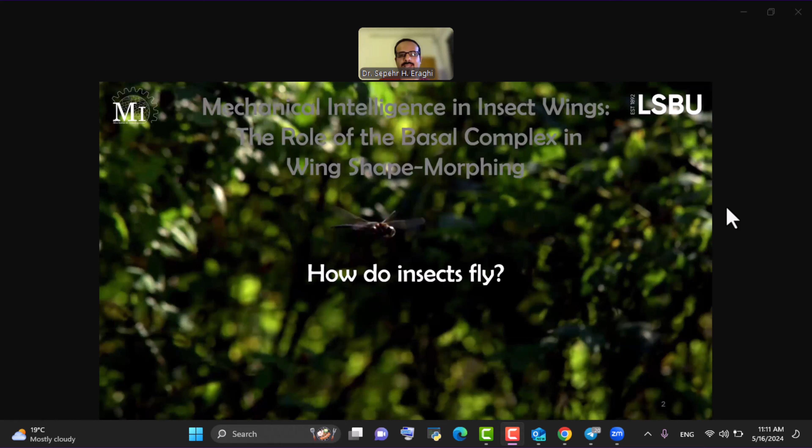Actually, the topic I want to talk about is mechanical intelligence in insect wings, but I'm going to start with an interesting question of how actually insects fly. We know that birds and bats have active flight muscles that allow them to control their wing deformations and thereby perform very sophisticated flight performance.

But unlike birds and bats, insects don't have any musculature across their wing design architecture, but they show very sophisticated flight performance, even more sophisticated than birds and bats. But how is that possible? The answer lies in the concept of mechanical intelligence. But what is mechanical intelligence?

As I told you, insects don't have any flight muscles across their wing architecture, but they are able to show very sophisticated flight performance. That's because of the very specialized wing designs that they have that allow them to automatically respond to the ever-changing environments and to ever-changing and unpredictable loading scenarios.

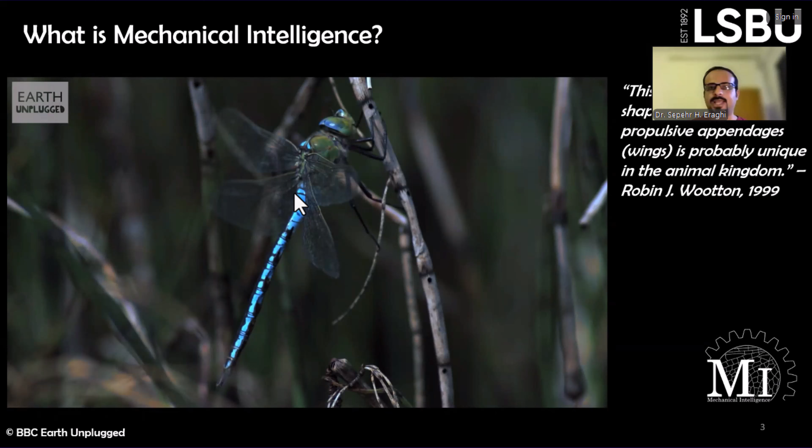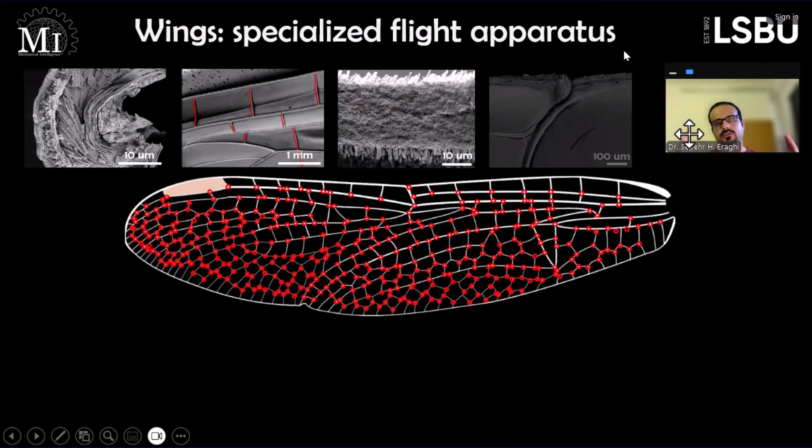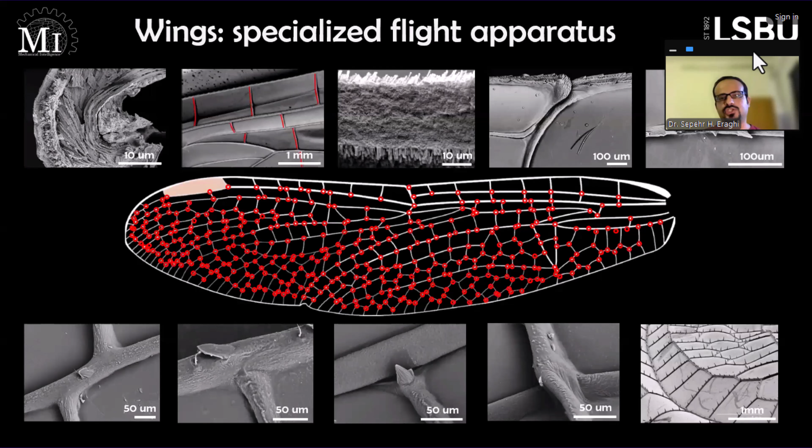And all of that is possible by the wing design architecture and the complicated and nonlinear interactions between the structural components of the wing architecture that give rise to a kind of collective intelligence that we refer to as mechanical intelligence. These design components consist of the wing layered material, the cuticle, and many different structural components, including the veins, different kinds of joints, the corrugation, and basal complex, which is actually the main topic of this presentation.

There is a widely held hypothesis in the literature saying that basal complex, which is a 3D component of the wing basal region, actually 1/3 of the base of the wing, can significantly contribute to the quality of wing deformations during flight. As you can see in this slide, there are different kinds of basal complexes in dragonfly wings.

We chose these species because they represent a wide variety of different Odonata species, which are actually dragonflies and damselflies, because they show diverse designs and also they cover different designs of the wings and also different sizes and flight styles of insects. To explore this hypothesis, we use different methodology.

We use different microscopy techniques, including scanning electron microscopy, confocal laser scanning microscopy, wide field fluorescence microscopy, and micro CT scanning to explore the morphological complexity of the wing, especially the basal complex, and show the presence of material gradient across the structural design of the basal complex, as you can see in this slide. The results show the complexity of the design.

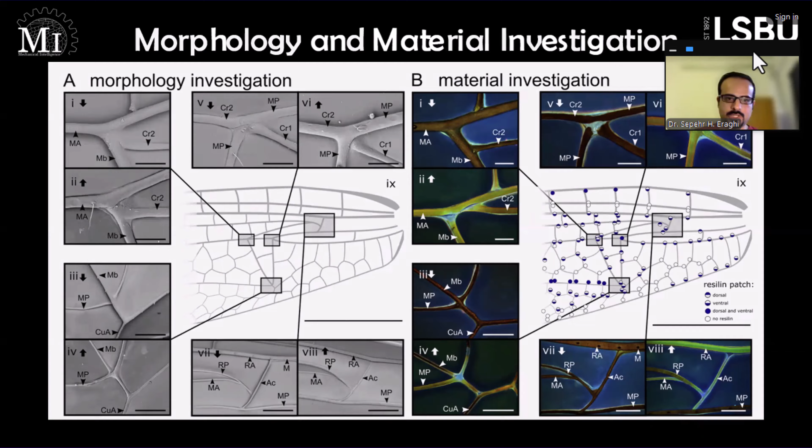And in order to show the role of basal complex in determining the quality and also quantity of wing deformations, we use mechanical testing as well. As you can see, we applied the force on a point of the wing, which is called radial vein posterior, which can replicate the deformations of the wing during flight. This idea was suggested by Robin Wootton, who is a pioneer in wing biomechanics.

And by doing so, we actually validated this idea that just applying a single force at a single point in the wing can replicate the wing deformations during flight.

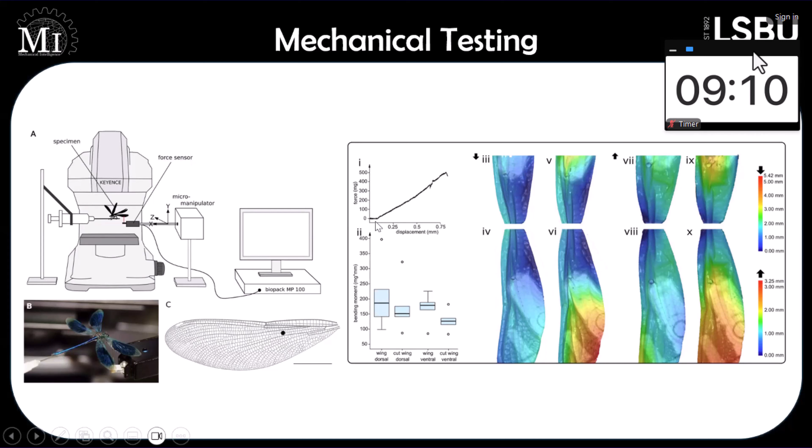And we also divided our experimentation into two categories, one with the intact wings and one where only basal complex exists, where we remove the two-thirds of the wing beyond basal complex. And the mechanical testing results show that basal complex does significantly contribute to the wing deformation pattern. When we remove the rest of the wing, the deformation patterns remain almost similar. Another interesting observation is that the force required to deflect the wings rises linearly, which is an interesting observation as well.

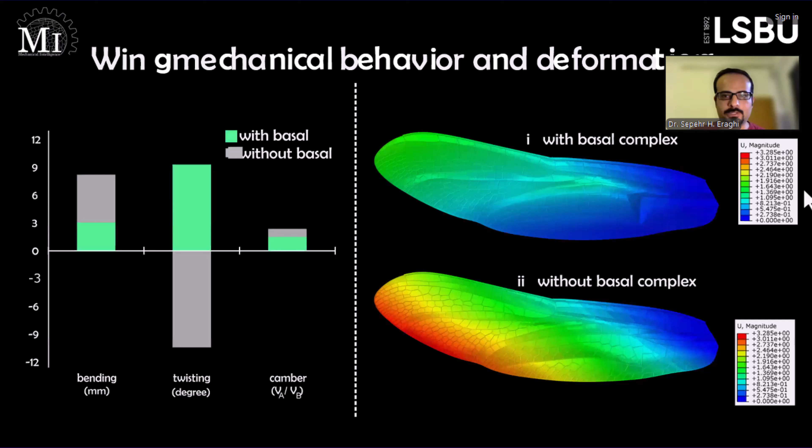In order to further validate our hypothesis that the basal complex significantly contributes to the wing deformation patterns, we developed the most comprehensive finite element model of the wing to date, which is the forewing of a dragonfly.

And in another model, we removed the basal complex by actually making it flat, because the structure of the basal complex is corrugated. And the results are quite interesting, as they show that when we remove the basal complex, as you can see on the left-hand side, the bending increases by 2.7 times, which can have a detrimental effect on the aerodynamic lift production of the wing.

More interestingly, as you can see here in the middle, the wing twists in the completely opposite direction, which means that the wing is actually not functional to produce lift and thrust for the insect to fly. The other thing is the camber needed for flight force generation is also reduced by 1.7, which also has a detrimental effect on the flight performance of the insects.

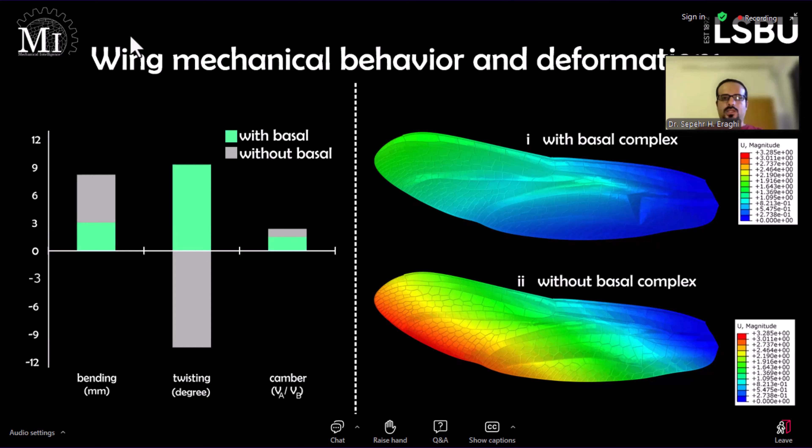But now, how does the basal complex actually work? As I told you, the structure and material of the wing is quite complicated, and there are many interactions between the structural components of the wing to allow it to create a cambered cross-section for the wing to produce flight forces. But the working principle of the mechanism is actually very simple.

As I told you, when we just apply a force on the ventral side of the wing, on the radial vane posterior, that raises and also elevates the RA, which is the radial vane anterior, and that in turn slightly pushes down the leading edge of the wing.

On the other hand, the medial vane anterior also rotates clockwise and thereby pushes the trailing edge down, which also promotes a cambered cross-section for the wing in order to produce aerodynamic lift force.

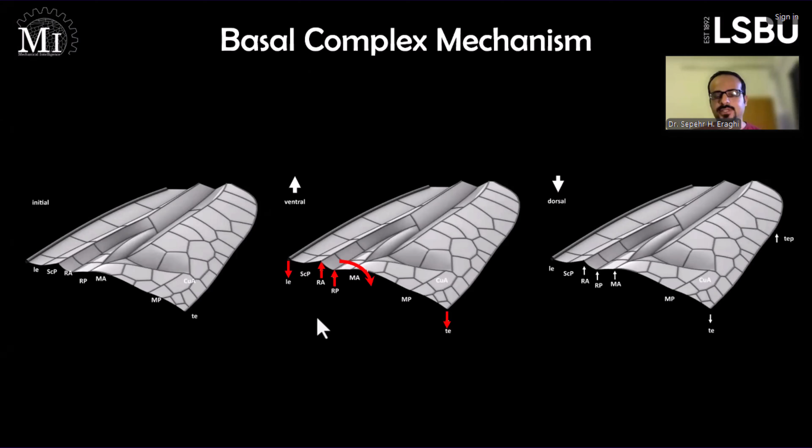And on the other hand, when we apply the force on the dorsal side, there is actually no camber formation, which is a characteristic of the wings of dragonflies, which only produce lift during downstroke. That means that they need to produce cambered cross-sections during downstroke.

But now the question is, what can be learned from this automatic shape morphing capability of the dragonfly wings to actually enhance the performance of current engineering systems? Here in this study, we have developed a linkage mechanism inspired by the basal complex of the dragonfly wing that uses a simple actuation to promote a cambered cross-section for the structure.

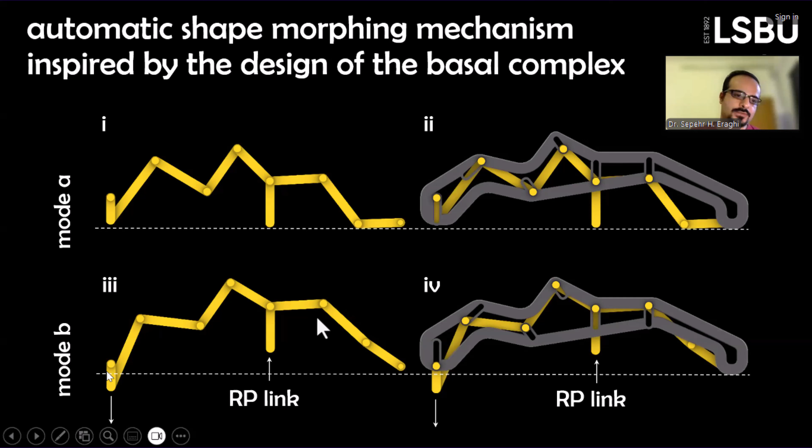And that can allow us to simplify the control mechanisms of current engineering systems by simplifying the sensing, control, and actuation. Here in this slide, you can simply see that pushing this link upward can promote the camber by pushing this edge downward.

And here you can also see how the mechanism works. Just pushing one link upward and downward can promote the camber across the entire structure. Then we use this design in the development of

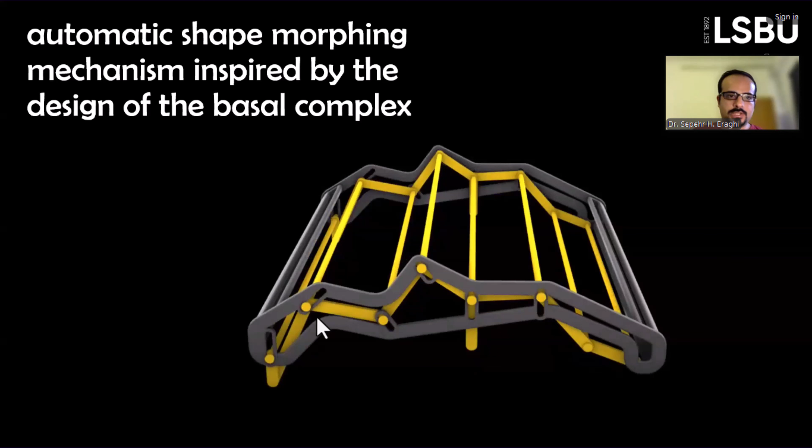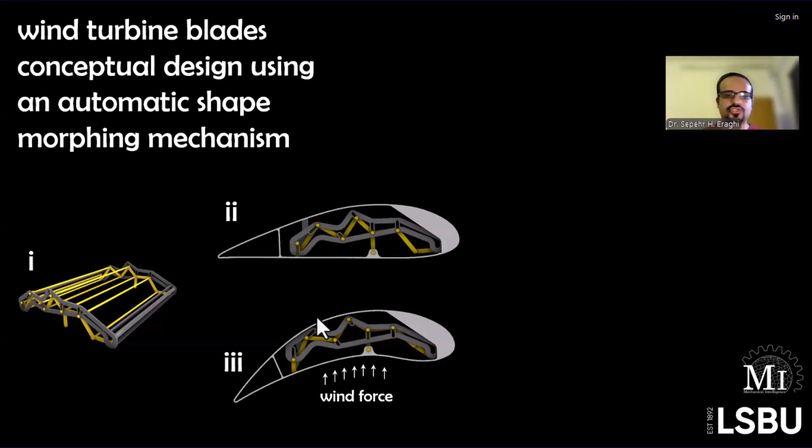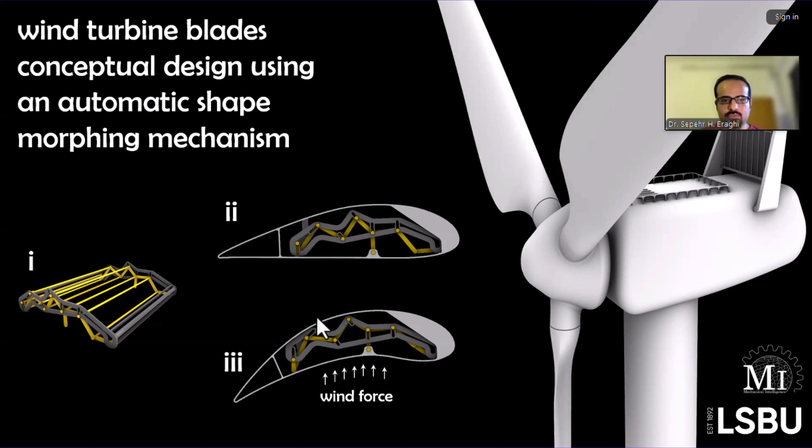wind turbine blades, actually aerofoils that are capable of automatic shape control, meaning that they can self-organize and adapt to different boundary conditions and loading scenarios that are imposed by the ever-changing environment, here in this case the wind force, that allows the aerofoil to automatically change its camber formation and thereby change the angle of attack so it can produce more energy.

And all of this has been possible due to the hard work and diverse skills of our team members at London South Bank University in the Mechanical Intelligence Research Group, who are from different backgrounds, including mechanical engineers, material scientists, electrical engineers, biologists, and computer scientists who are experts in machine learning and artificial intelligence.